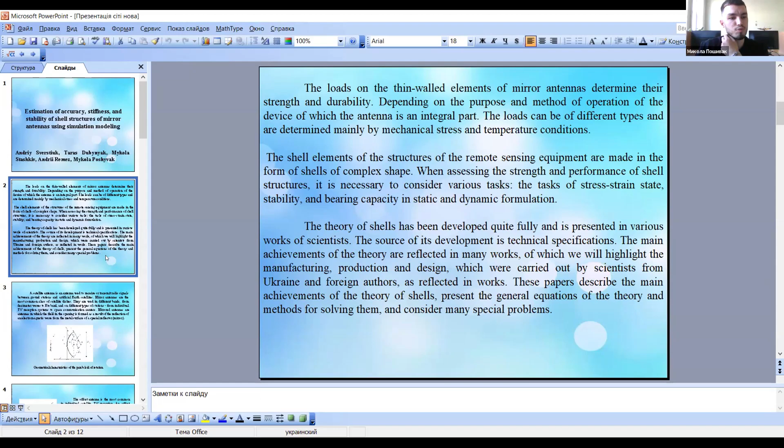A satellite antenna is an antenna used to receive or transmit radio signals between ground stations and artificial Earth satellites. Mirror antennas are the most common class of satellite dishes. They're used in different bands from decimeter waves to Ku-band and on different types of stations, from individual TV reception systems to space communication centers.

Mirror antennas are antennas in which the field in the opening is formed as a result of the reflection of an electromagnetic wave from the metal surface of a special reflector mirror. So you can see the geometrical characteristics of the paraboloid of rotation.

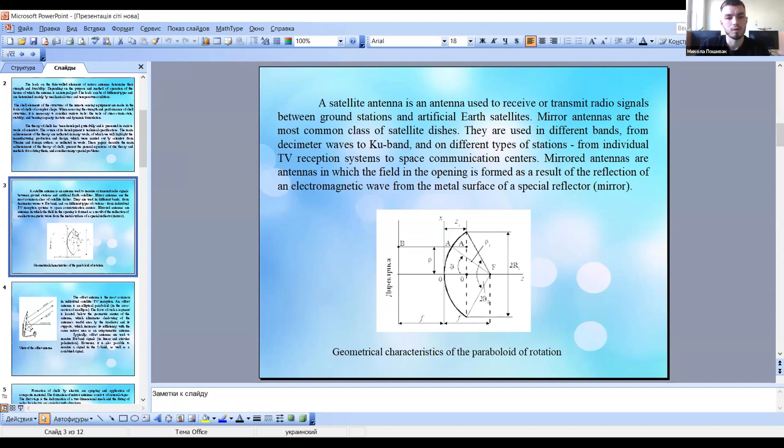The offset antenna is the most common in individual satellite reception. An offset antenna is an elliptical paraboloid with the cross section of an ellipse. The focus of such a segment is located below the geometric center of the antenna, which eliminates shadowing of the antenna's useful area by the irradiator and its support, which increases its efficiency with the same mirror area as an axisymmetric antenna. Typically, offset antennas are used to receive Ku-band signals in linear and circular polarization.

However, it's also possible to receive a signal in the C-band as well as combined signals. So you can see the values of the offset antenna.

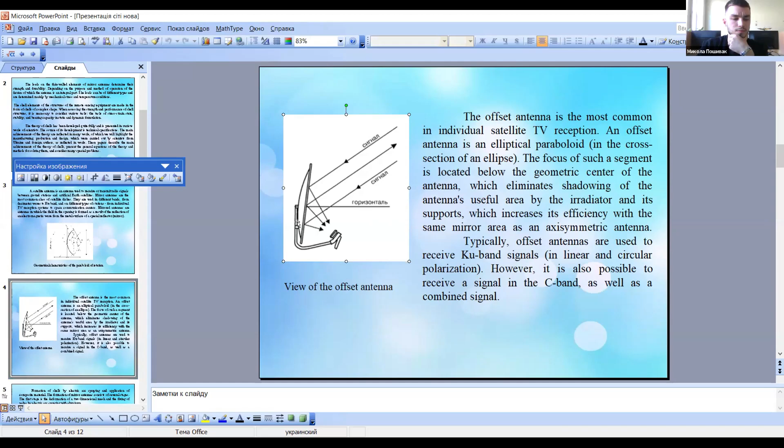Formation of shells by electric arc spraying and application of composite material. The formation of mirror antennas consists of several stages. The first stage is the deformation of a two-dimensional mesh and the fixing of nodes by electric arc spraying with aluminum. Now we can see the electric arc spraying method for mesh material.

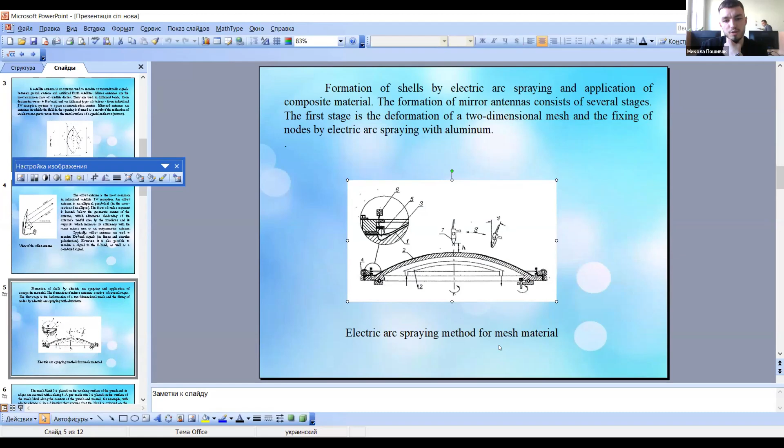The mesh blank 3 is placed on the working surface of the punch and its edges are fixed with a clamp 4. A pre-made rim 5 is placed on the surface of the mesh blank along the contour of the punch and moved, for example, with elastic clamp 6, in directions that ensure that the blank is crimped on the working surface of the punch.

For the manufacture of large size shells, one or more additional mesh blanks with larger meshes and made of wire of larger diameter are applied to the first blank with small meshes. The second stage after spraying on the punch is to obtain a surface with a high temperature and apply a composite material such as polystyrene.

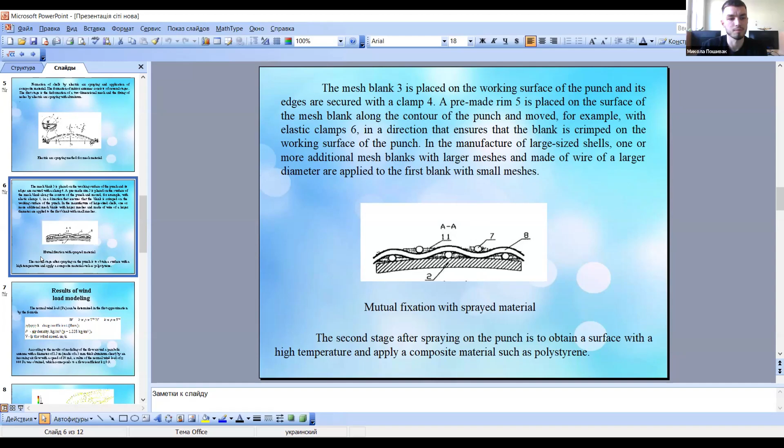So, results of wind load modeling. The normal wind load in Pascal can be determined in the first approximation by the formula. According to the result of modeling of the flow around the parabolic antenna with a diameter of 1.5 meters made of a 3 millimeter thick aluminum sheet by an incoming air flow with a speed of 20 meters per second, a value of the normal wind load of 440 Pascal was obtained, which corresponds to the flow coefficient K 0.9.

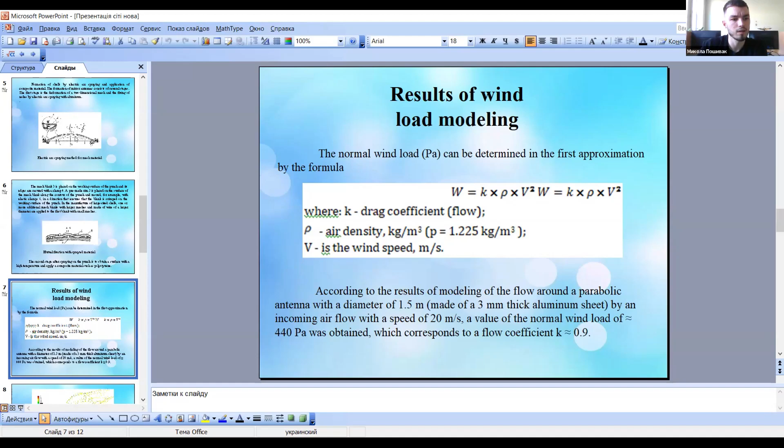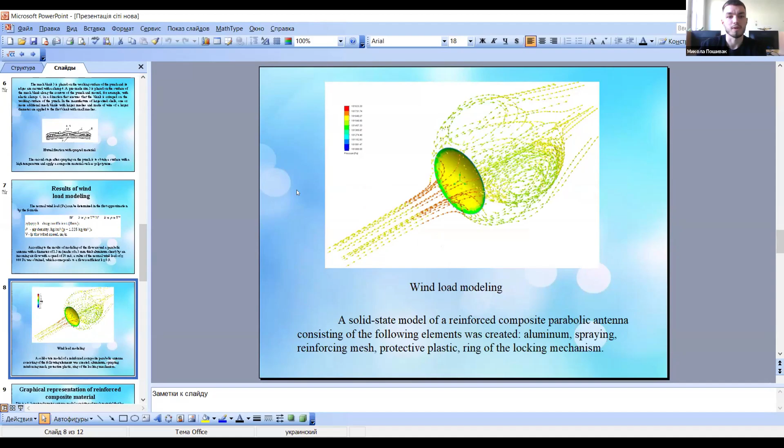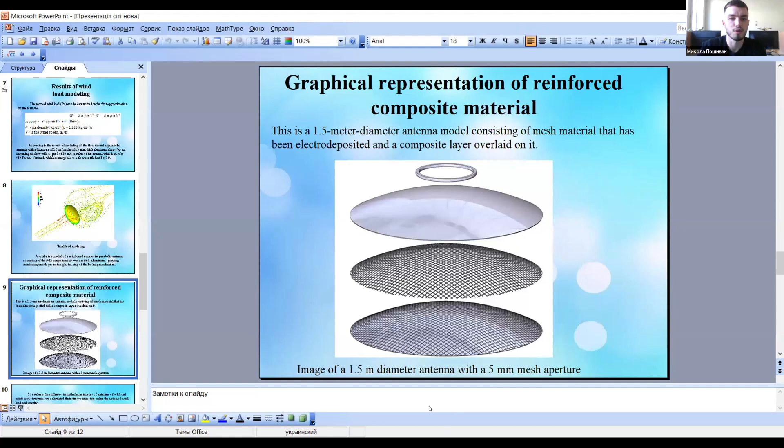To evaluate the stiffness and strength characteristics of antennas of solid and reinforced structure, we calculated the stress-strain state under the action of wind load and gravity. So we can see the safety factor for a 3 millimeter thick aluminum antenna, and we can see the safety factor for a reinforced composite parabolic antenna.

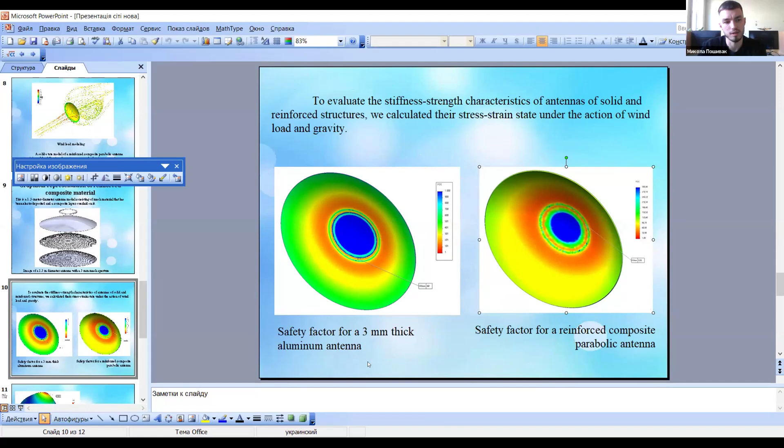The options show results on the estimation of accuracy, stiffness, and stability of shell structures of mirror antennas by means of simulation modeling as a basis for their use in cyber-physical biosensor systems. We can see the deformation of the antenna made of a solid sheet of aluminum under wind flow. Scale of deformation display is 2000:1.

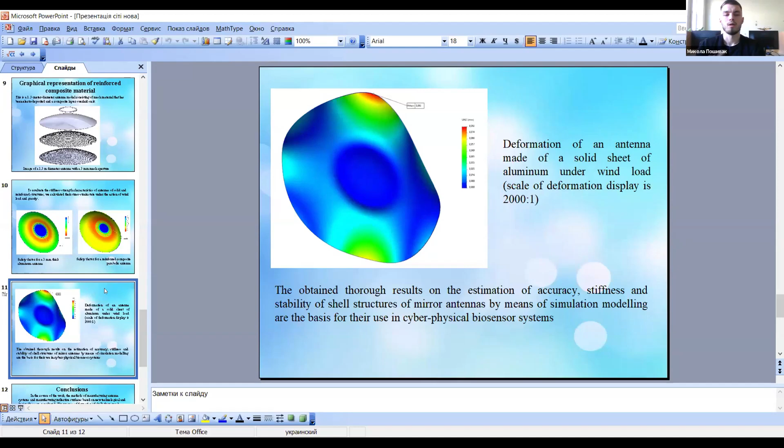Okay, so my conclusion: in the course of the work, the method of manufacturing antenna systems and manufacturing reflective filters based on new technological design is considered. The process of formation of shells from mesh material that can be used for the manufacture of axisymmetric and non-axisymmetric reflectors for individual elements of mirror antennas is investigated.

This is because the formation of this material consists of several stages. The first stage is the formation of the two-dimensional mesh and fixing of the nodes by electric spraying with aluminum. The second stage, after sputtering on the punch, is to obtain a surface with a high temperature and apply a composite material such as polystyrene.